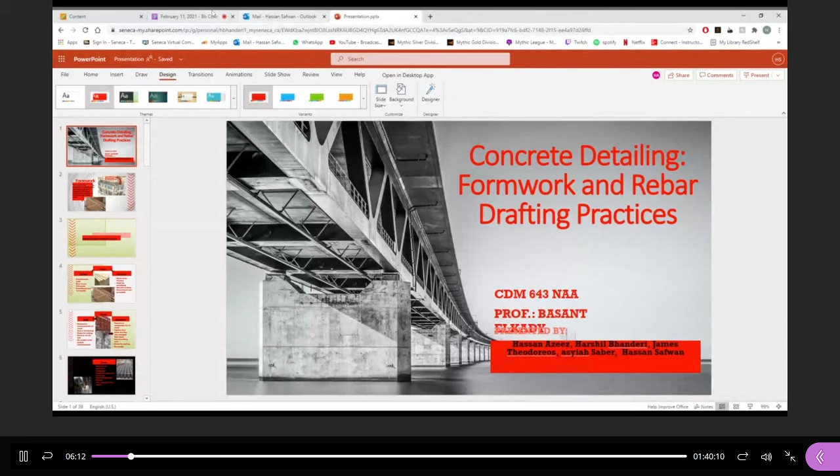Okay, so I will be the first. You'll be what? The first? I don't know if you'll be the first. I don't know. Yeah, okay. Will you be the first person to speak? I don't know. That's between you guys. Should have this all planned. Okay, I'm gonna mute myself. You guys take it over. Good luck. Okay, and you have your time here. So I'm gonna mute myself now. Okay.

Hello, everyone. Today, Group 2 will present the subject concrete detailing, formwork, and rebar drafting practices. A simple definition of concrete is a heavy, rough building material made from a mixture of cement, aggregate, natural sand, crushed stone, gravel, recycled concrete, air, and water that can be sprayed or poured into a formwork. And here, I will explain what formwork is. Next.

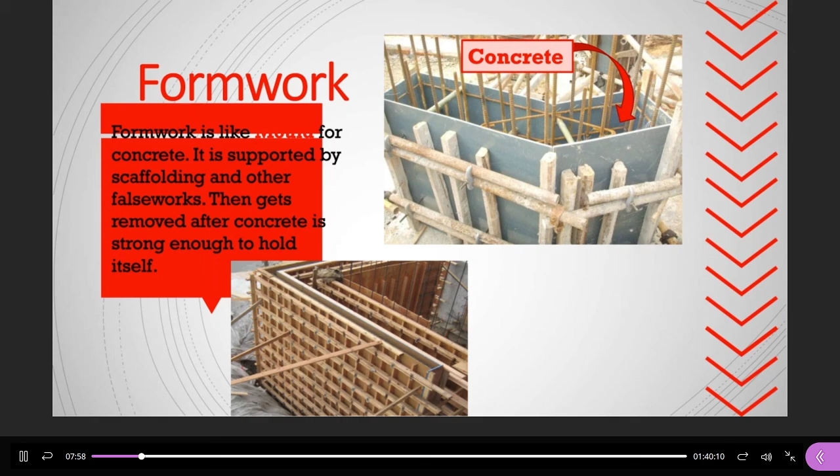Formwork is a temporary structure used as a mold in which the concrete is poured to create concrete slabs and other structures. Formwork holds freshly poured concrete until it's strong enough to hold itself. While the concrete dries in the mold, scaffolding and other falsework is used in the meantime to support the formwork. Some things need to be taken into consideration when using formwork: the sides and base should be able to resist the pressure of wet concrete. After the concrete dries and can hold itself, the formwork is removed, and sometimes the removed formwork can be reused afterwards. Next.

Material and what determines them. Next. As an ideal goal, material has two things. Materials for formwork should be easily obtainable and reusable. Second, the material should be able to withstand the weight and be resistant to distortion when exposed to the concrete and other elements. There are many kinds of material. First, timber. Traditional formwork uses timber wood as the main material, mostly used as a bracing member, and commonly available material, which has excellent strength, weight, and cost factor. Timber forms have limited usage and short lifespan.

Second, plywood is a special type of timber, manufactured wood, used especially for sheathing and the contact face, as it provides a smooth finish. It reduces the cost of building, as the smooth surface saves the cost of smoothing the concrete afterwards. Plywood gives more reuses compared to timber, but it still has a short lifespan. Next.

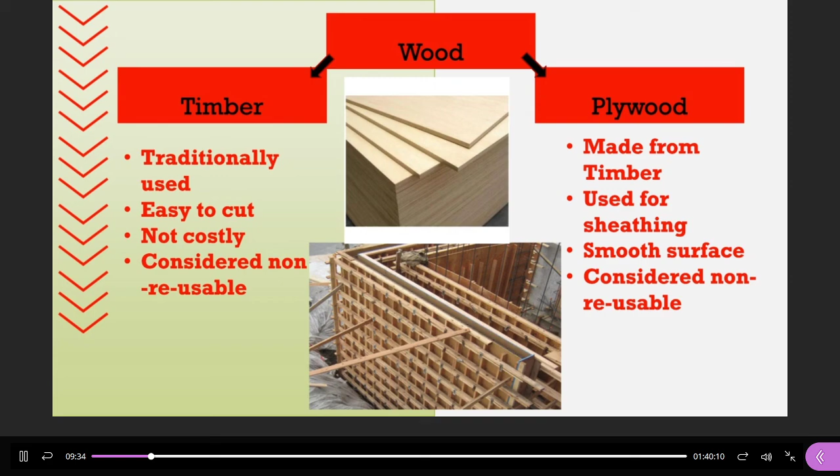Steel is very costly but has indefinite potential for reuses. It is more economical to use as it has a long lifespan. Also, they provide rigidity and strength compared to other material. It is used for heavy formwork structure like a bridge formwork.

Although there are a few problems with the steel as a steel sheet formwork, it is prone to corrosion and rusting. Also, they are harder to cut and resize since they are manufactured in a standard size, which brings difficulties for irregular dimensions. So it needs a certain level of maintenance and should be oiled after each use to avoid corrosion and rusting.

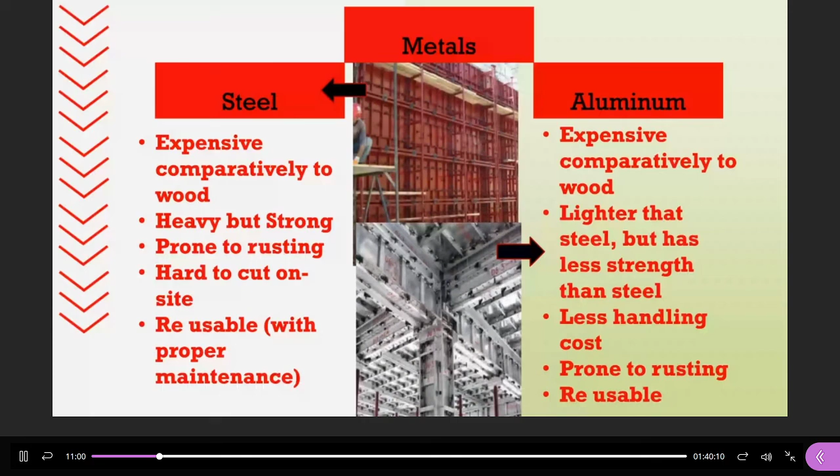Aluminium is mostly used for a prefabricated formwork, which is created on site and requires less handling. It also requires less support and ties. It reduces the handling cost since it has a lighter weight. Aluminum alloys are used for corrosion resistance and extra strength. Next.

Plastic. Plastic is best suited for low cost, repetitive structures. It is light in weight and very durable and can be reused many times. It can be reinforced with glass, but cannot take much load compared to the metal formwork. Next.

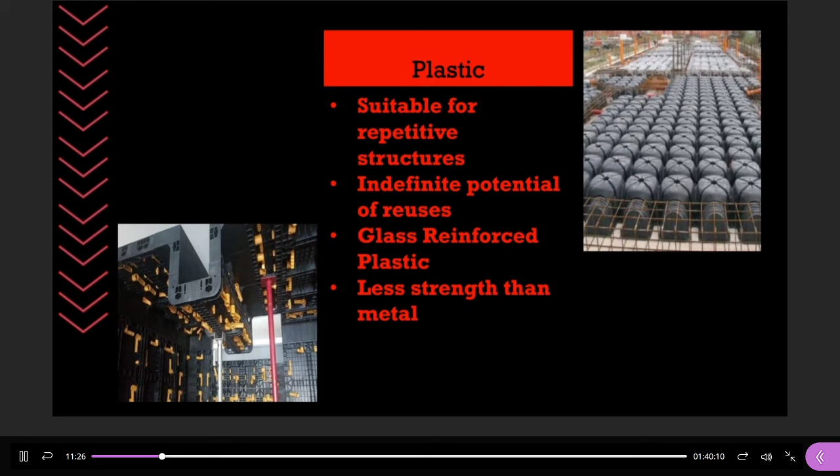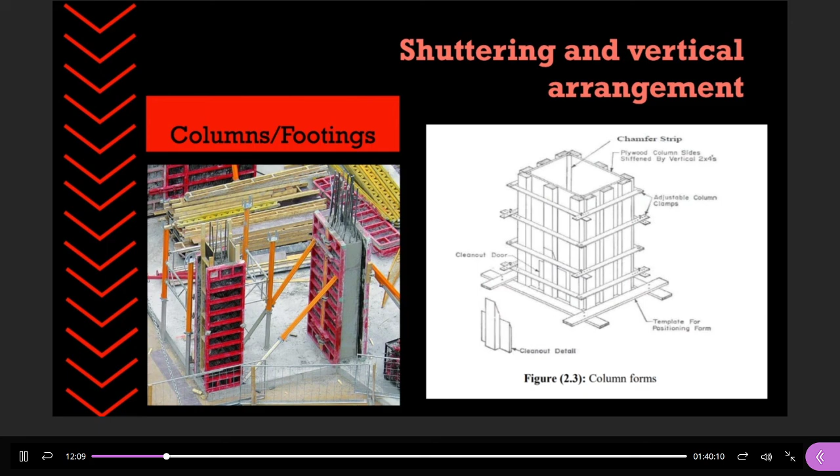Structure using formwork. Vertical arrangement. Next. For structures like column and footing and such, it consists of vertically arranged molds. Ideally, it should allow a quick assembly. Material for columns varies depending on the shape of the column. Wood and steel are often used with square and rectangular columns, but steel and fiber reinforced plastic are available for round column forms. Next.

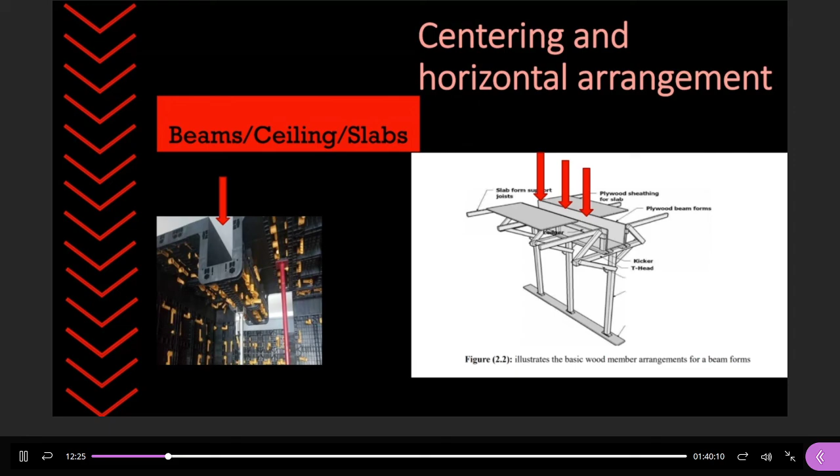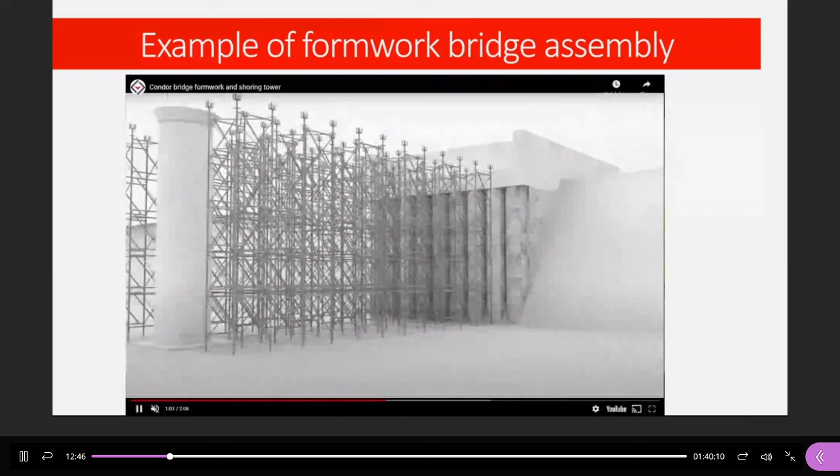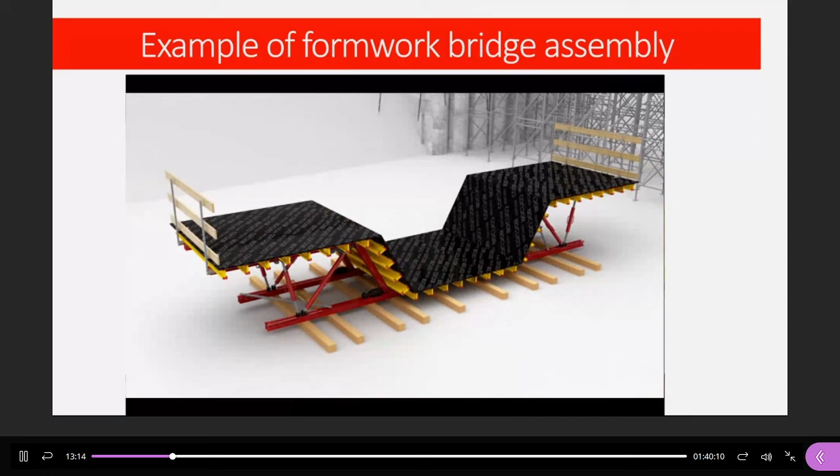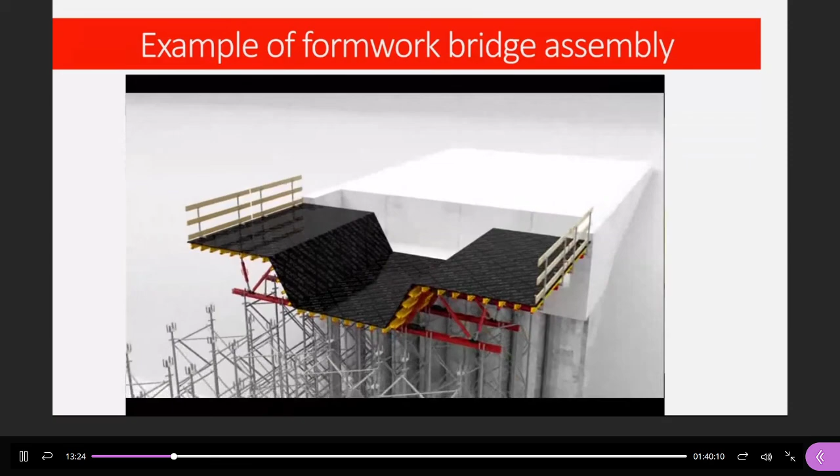This is an example of a bridge formwork, a bridge assembly. This is a very short video. This is the scaffolding. And they try to assemble the formwork. And this is the plywood, because we need a very fair face with no finishing. They put it on the scaffolding. And this way, you can put the concrete. After it is dried up, they remove the formwork.

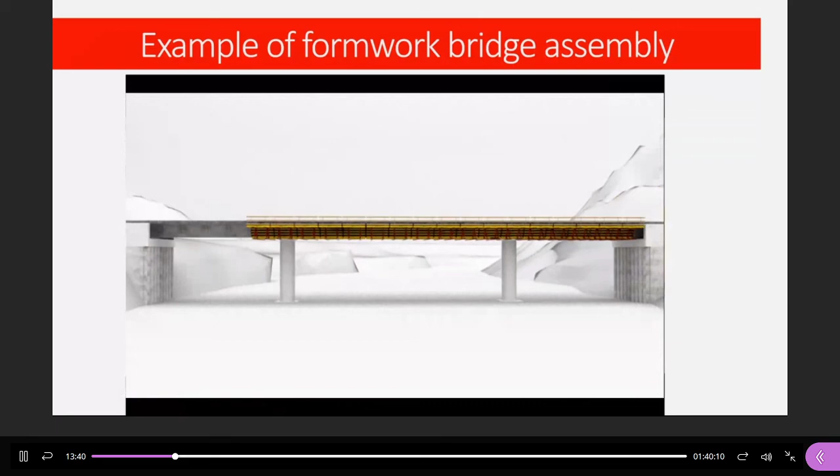Thank you very much. The second part of formwork with Harshal. Okay, go on. Yes, thank you very much, Stefan.

So formwork requirements, you could also say formwork objectives. Let's start with the economy. Economy basically means cost. For example, like Hassan said, there are different types of materials: steel, plastic, wood. So the contractor should know which material to use and which is better for them. For example, steel is very expensive to buy, but you could keep recycling it many times, more than wood. But the contractor should also consider whether they have space for storage. So all these factors need to be considered.

Next, quality. Sorry, no, just go back. Yeah, quality. So when creating a formwork, the contractor should ensure that the shape is not changed. If the shape is changed, it could reduce the strength of the column, for example, and it could lead to a structure failure.

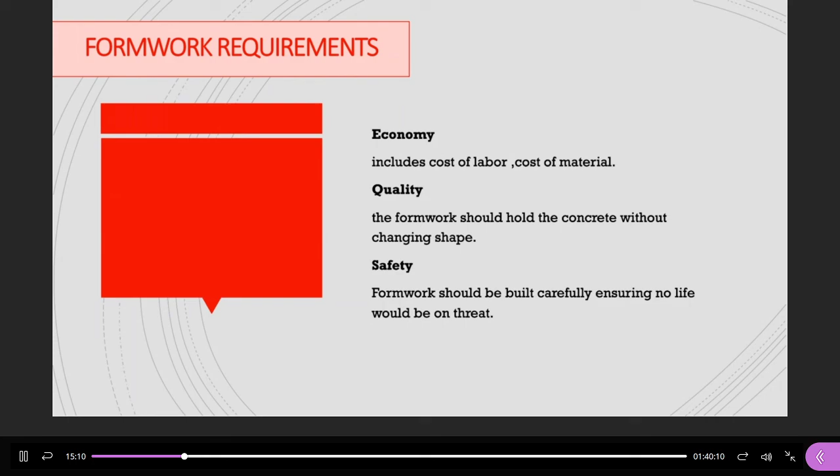Safety. Safety is very important because, for example, with a slab formwork, the workers are working on top of it, pouring concrete, and if the slab formwork fails, the workers fall down a steep hole and it could lead to death or other long-term effects. Next.

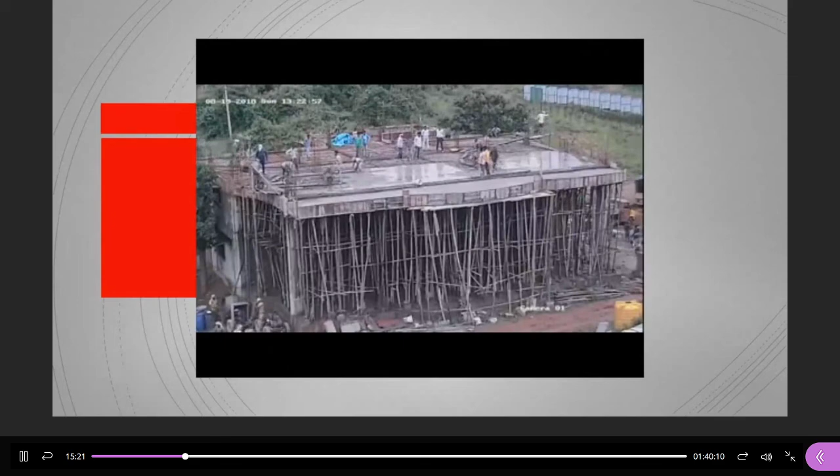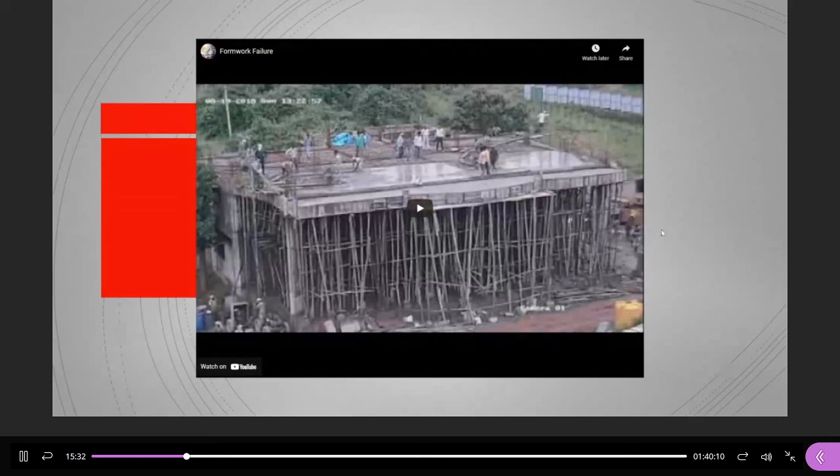Yeah, this is a short clip showing what it looks like. Yep. So this basically shows why safety is very important. Let's analyze what was the cause of formwork failure. So first one, inadequate bracing. As you could see in the picture, the load at one side is overloaded, which allows the bracing to fall, and it leads to unexpected pressure on other bracings, and it could lead to failure in the structure. Next.

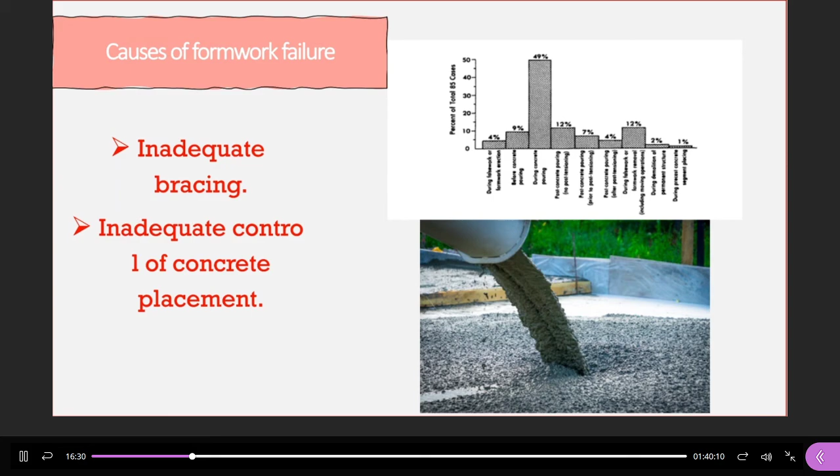Yeah, vibration and impacts. So on a construction site, there is very heavy machinery working, which could cause the bracings, for example, to shake or fall, which could lead to unexpected pressure on other bracing. And also impact: when the workers are working, they could hit a bracing and one bracing could fall over. Without them knowing, there is a weakness in the system, which also causes failure. Next.

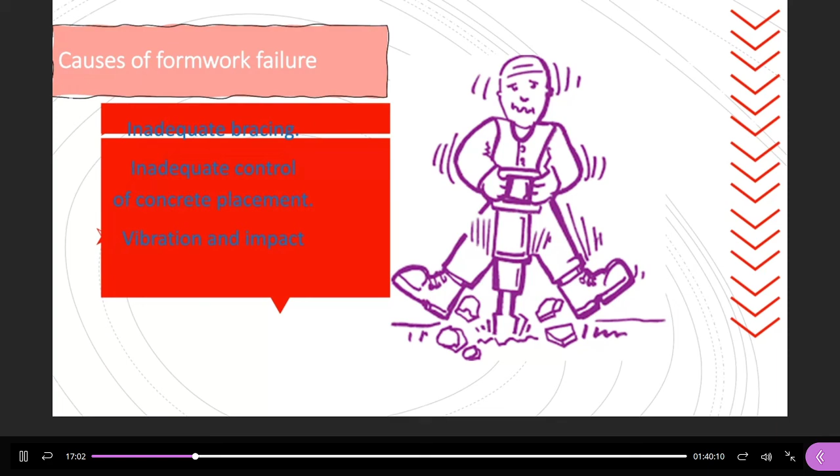Sorry about this. I think someone changed the theme. We were working online, so yeah, it's not visible, but I'll tell you.

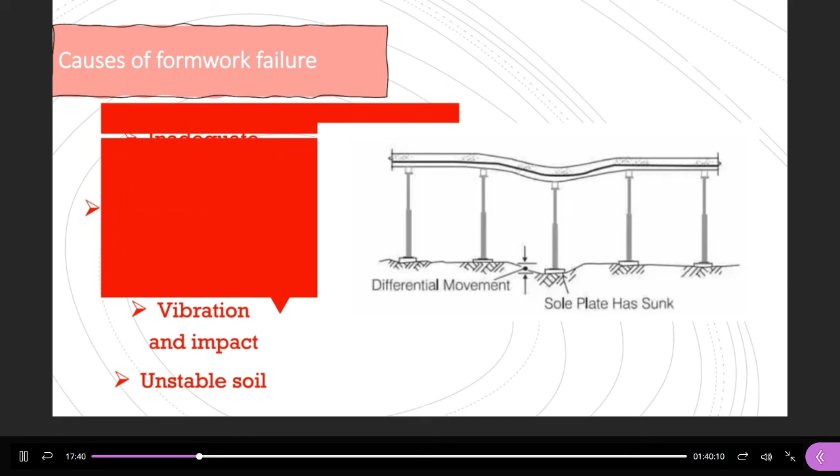Yeah, also here someone changed the theme. We are working online. Sorry about that.

So the next was lack of attention to formwork details. This is usually when the contractor is inexperienced, lacks knowledge, or just carelessness. So this is usually a small mistake like not tightening the formwork properly, or miscalculating the load of the concrete when pouring. So this is very important work. Like I said, it's safety related. So the contractor should ensure that no detail is left over and should review it again.

And the last one was improper stripping and shore removal. The contractor again should ensure that when removing the formworks and the shores, the concrete is cured properly and is not still wet or not yet strong enough to hold the structure. So it should be ensured that the concrete is cured properly, so they can remove the shores and strip safely, so that there is no deformation or sagging causing a failure in the structure. Yep, next.

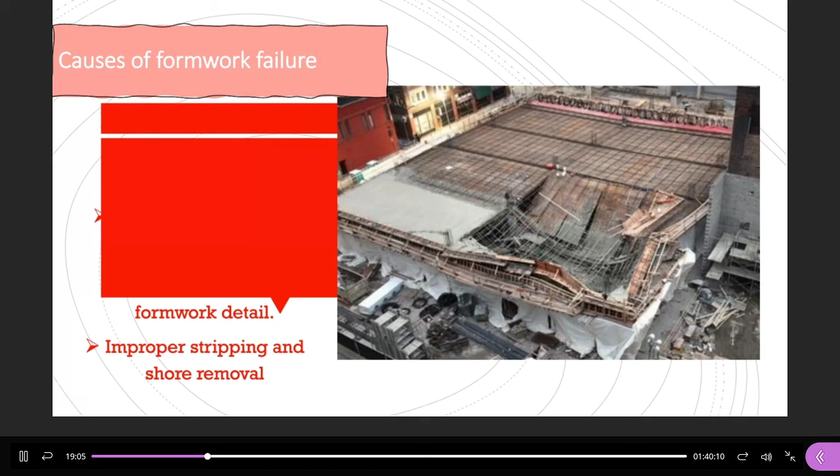I'll ask James to take over. Hello?

Okay, let's start off with the drafting practices. One of the most important parts of construction has to be the planning and drafting. Would you agree? Planning the location, the cost, and what you're building. Next slide, please. That is why we have design software to help draft up a plan and create blueprints for the rebars. And depending on the designer or the engineer, is what program they prefer.

This is a list of a bunch of programs: Bentley's own ProConcrete, RebarCAD, and the list goes on. But one of the most important ones, or one of the better ones, is Revit. Revit is a powerful tool that allows designers to create a vision in 3D. BIM Revit allows every member to be able to make easy changes in the program for the project, almost like Google PowerPoint or Excel.

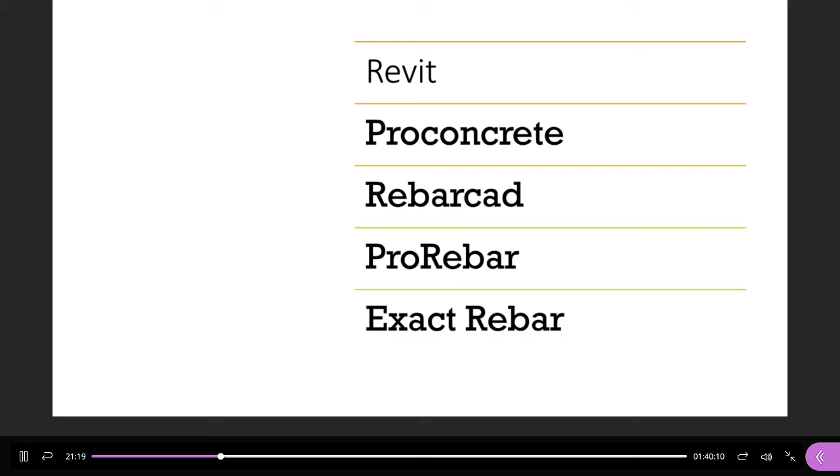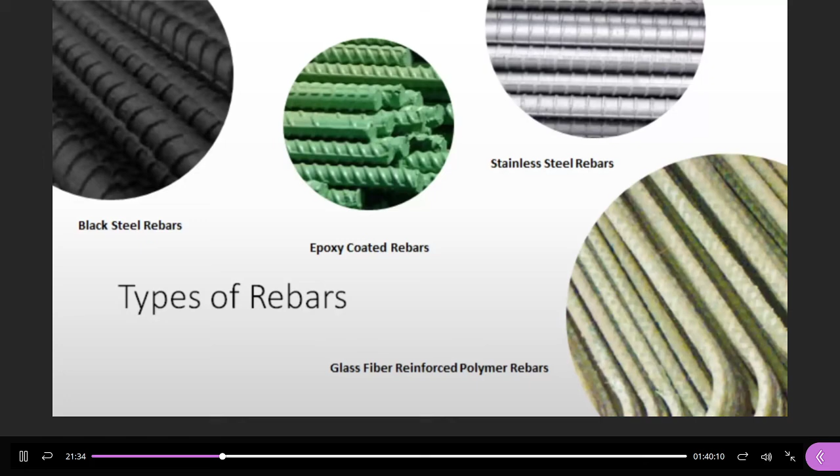So there's 4 main types of rebars. And depending on the design is what we use. There's advantages and disadvantages to all 4 of them. So what are they? Next slide. So black steel, one of the most commonly used rebars on the field. Why? Because it's cheap. They have great tensile strength. They can be welded or bent on site.

And the only disadvantage to it is that it corrodes in the concrete. This is very bad because when rebar corrodes, it can cause cracking and breaking of the concrete. So to prevent this, they usually add an anode next to the rebars to deoxidize the bars. But this is also an extra cost. Next slide.

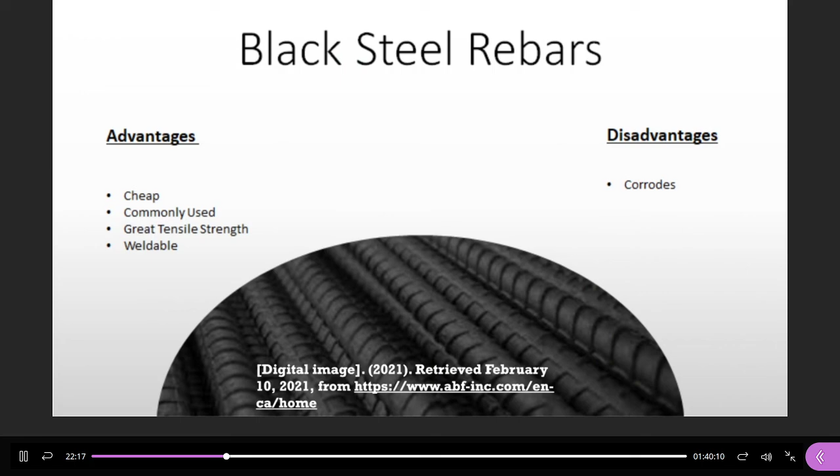So someone invented the epoxy-coated rebars. This was supposed to solve the problem of corrosion and oxidization. Well, it does, but I guess you're asking me, why do I have it as a disadvantage? Well, epoxy-coated is just black steel that is painted with epoxy. When placing and installing the bars, they can get nicked or the epoxy can chip off, which will lead to corrosion.

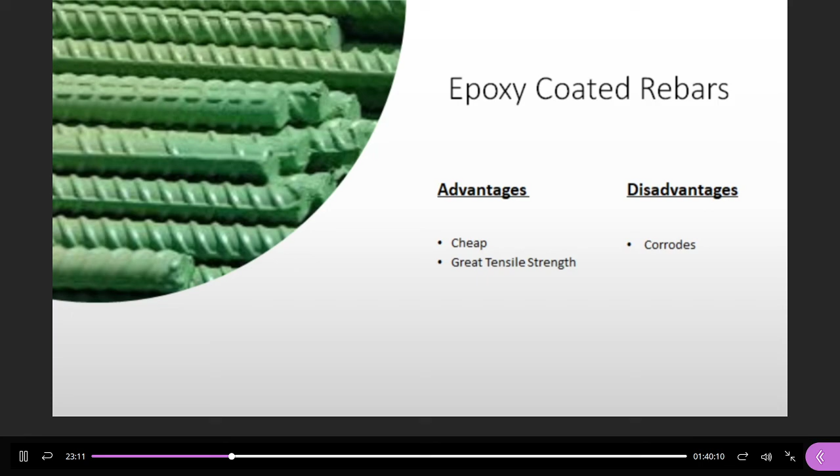Fun fact, MTO, even though they have plenty of suppliers of epoxy-coated rebars on their DSM list, they are gearing away from this type of rebar. Next slide. So here comes glass fiber reinforced polymer rebars. That's a mouthful. They don't corrode, they're light, can be cut on site easily, they're strong, they have a long lifespan. So what are the disadvantages besides a really long name?

Well, GFRP, as it's known on the field, costs a little bit more than black steel or coated steel. You cannot bend it on site, so whatever you order is what you get, and it can be brittle. So imagine pulling a rebar with tensile force. That bar, once it reaches that max force, will stretch and will continue stretching and become weak.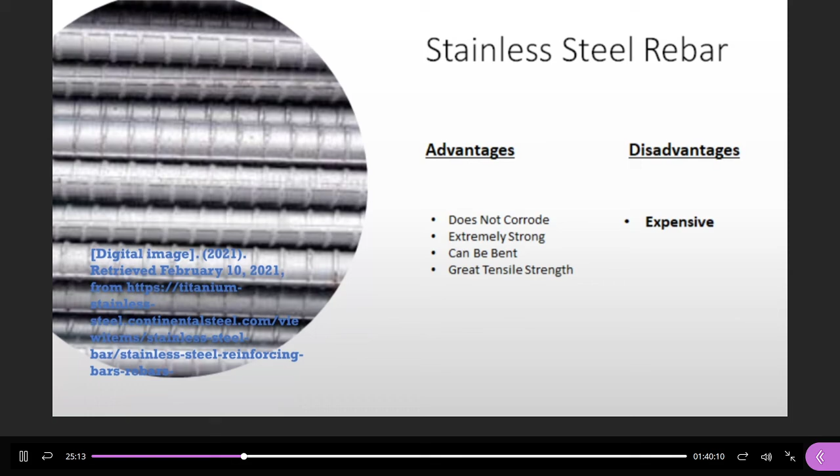So when rebars come on site, there are markings that you should know. There's the mill markings on the top, and right next to it you will see the 15M that will indicate the size. The SS indicates stainless steel.

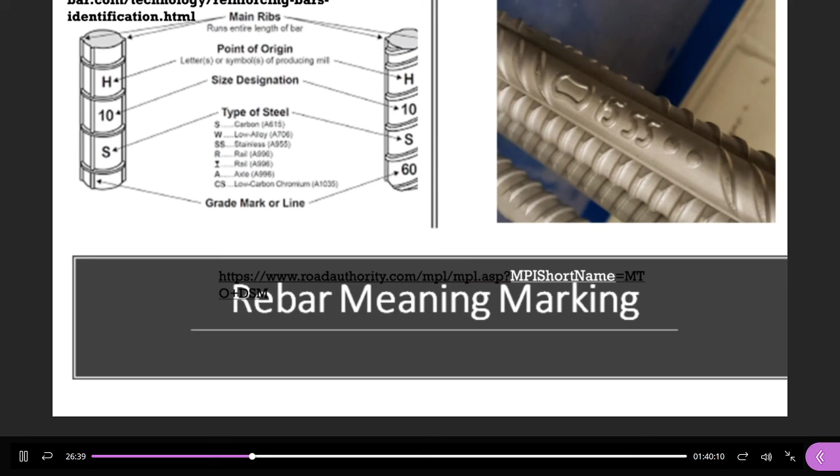Now, to figure out what kind of rebars you are looking at, there's a link provided here. That will take you to the designated sources of materials, the DSM list, that MTO allows. So the DSM list is actually a list of approved materials that MTO allows on their projects.

Enough about rebars. Let's talk about placement of rebars.

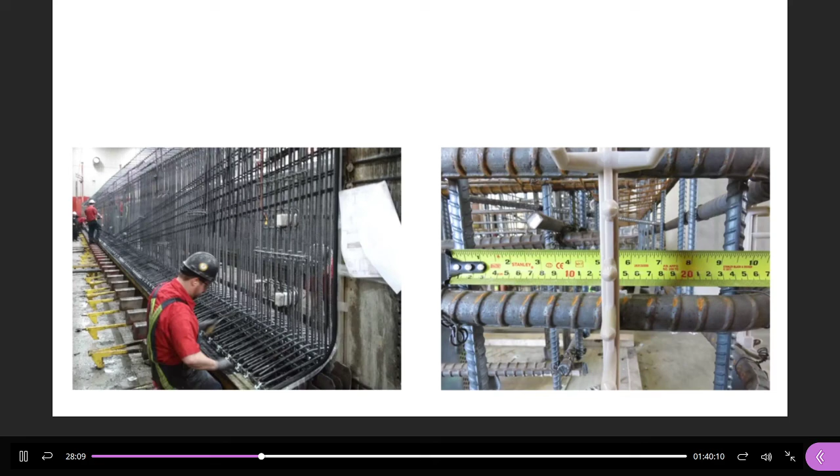This picture on the left here should look familiar. It is actually one of our exercises, exercise B, girders. You can kind of make out the shape there. So what they do is they form the rebars first, put it in a mold, and then pour the concrete after.

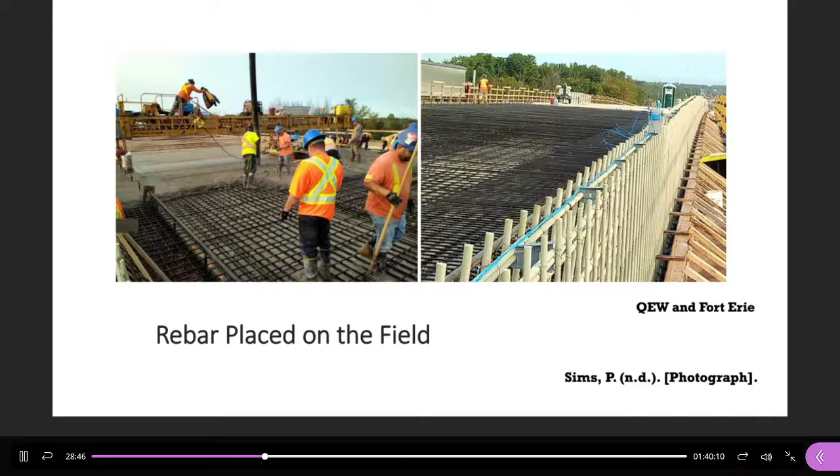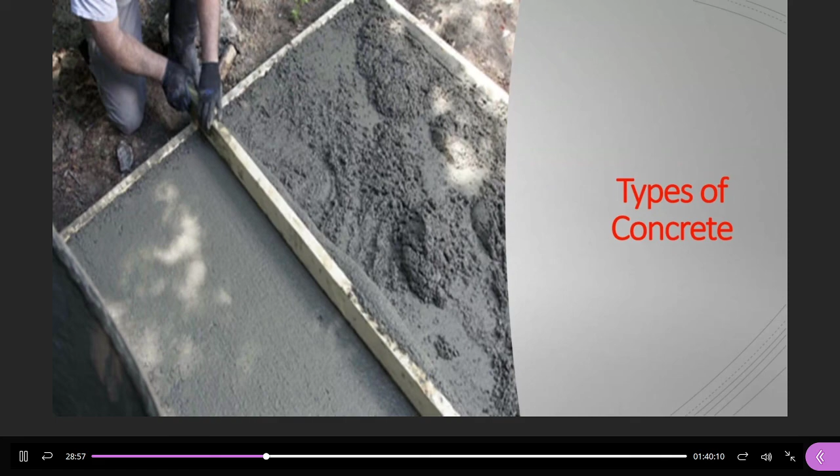Hi guys, I want to talk about types of concrete. Concrete is composed of coarse aggregates, cement, and water, and they create construction materials when mixed together. These ingredients should usually be mixed in a ratio of 1 part cement, 2 parts sand, 3 parts gravel, and half a part water.

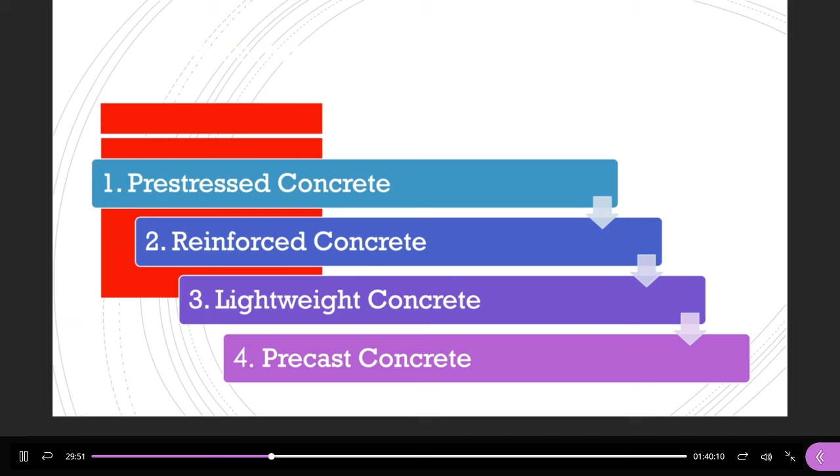There are many different types of concrete that can be used for bridges: pre-stressed concrete, reinforced concrete, lightweight concrete, and precast concrete.

Prestressed concrete is created using a special technique, like reinforced concrete. It includes bars, and when the concrete is mixed and placed, these bars are placed at each end of the structural unit where they are used. Prestressed concrete is used to build bridges, heavy loaded structures, or roofs that have long spans.

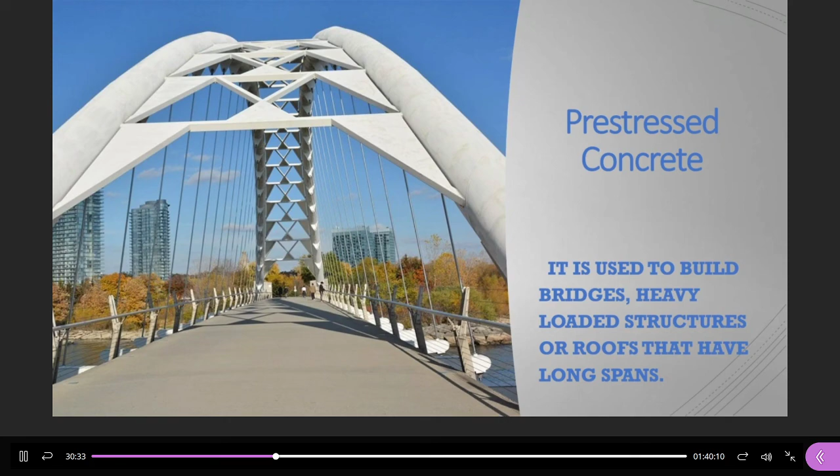Reinforced concrete is widely used in industry and modern construction. The strength of reinforced concrete is aided by placing wires, steel rods, or cables in the concrete before it sets. Buildings, bridges, and roadways rely on reinforced concrete. Here's an example of a reinforced concrete design lab test. You can see, okay, please play it.

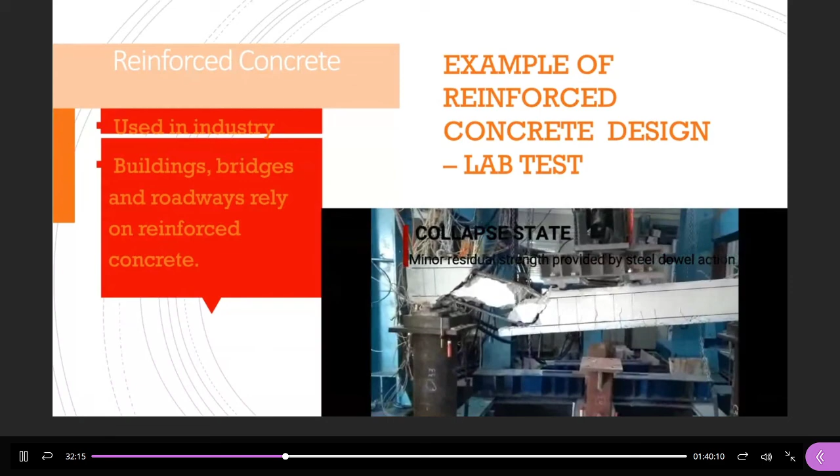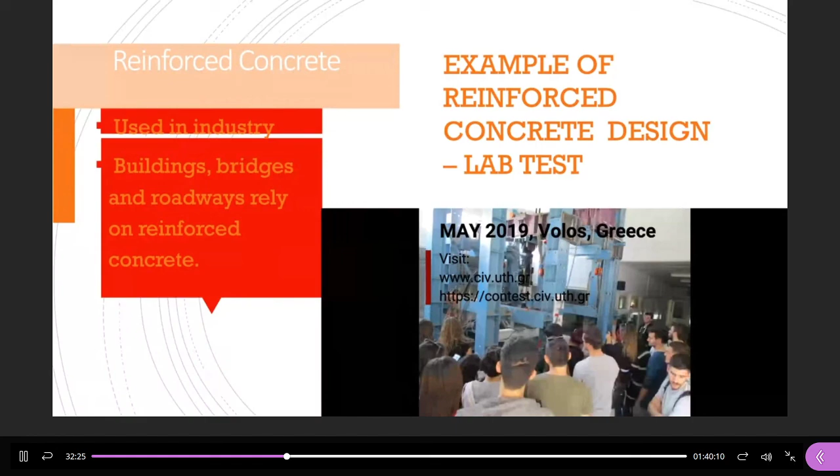Lightweight concrete is a kind of concrete that has a density of less than 1,920 kilogram per meter cube. Lightweight concrete is created by using lightweight aggregates, which are ingredients that reduce the density of the concrete. These lightweight aggregates include natural materials like scoria or pumice, and artificial materials like clay and expanded shales.

Common uses for lightweight concrete include creating long spanning bridge decks and building blocks, and it can also be used to protect steel structures.

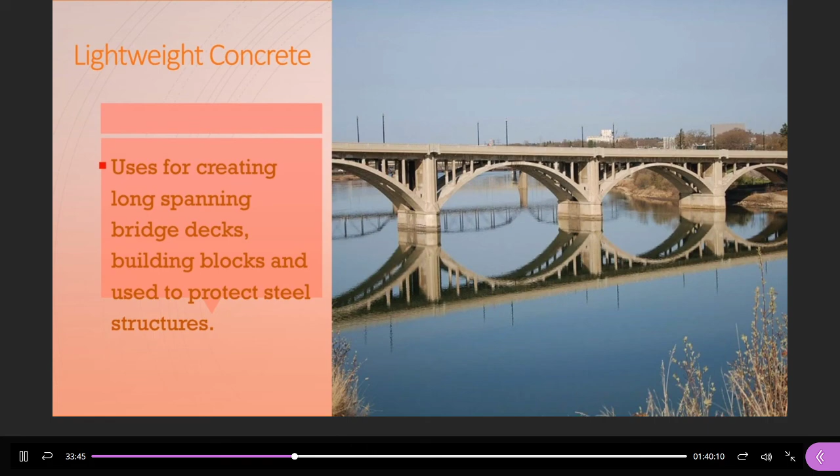Precast concrete is created and cast in a factory according to exact specifications. Precast concrete units are then transported to the site and assembled. It is used for bridges, concrete blocks, precast walls, staircase units, and poles.

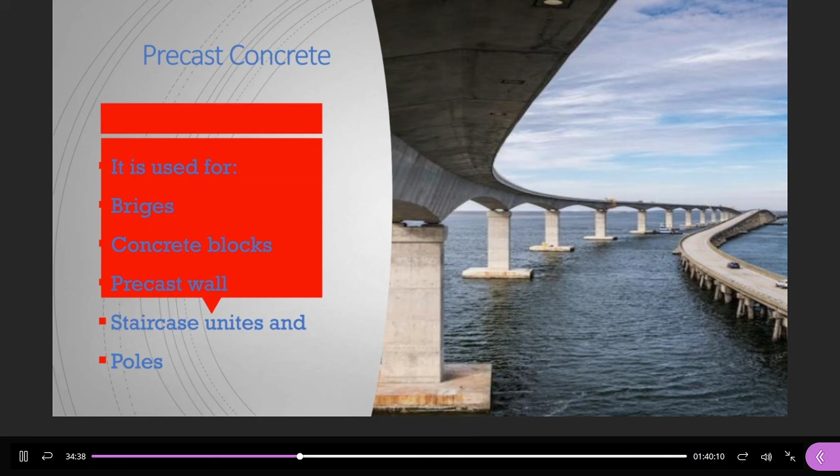The advantages of using precast concrete are its speedy assembly, since the units are manufactured in a factory, and they are of very high quality.

So I'm going to be talking about precast versus cast in situ. Precast is usually built in a factory, in temperature-controlled environments where temperature is adjusted for optimal strength. In factories, concrete tends to be stronger because you eliminate worksite complications.

For example, at a worksite you would have fluctuating temperatures, changing humidity, sun exposure, or no sun exposure. All these affect the quality of concrete. In a factory, they have special tools to create better end results.

One common tool used is a shaker. I don't know if that's the actual terminology, but what it does is vibrate the concrete to cause air bubbles to escape easier, ultimately making it more dense and stronger.

The drawbacks of precast are that the materials need to be transported and carried onto a site, usually with a crane, which adds some complexity to projects. Here I can show you a picture of them arranging a bridge.

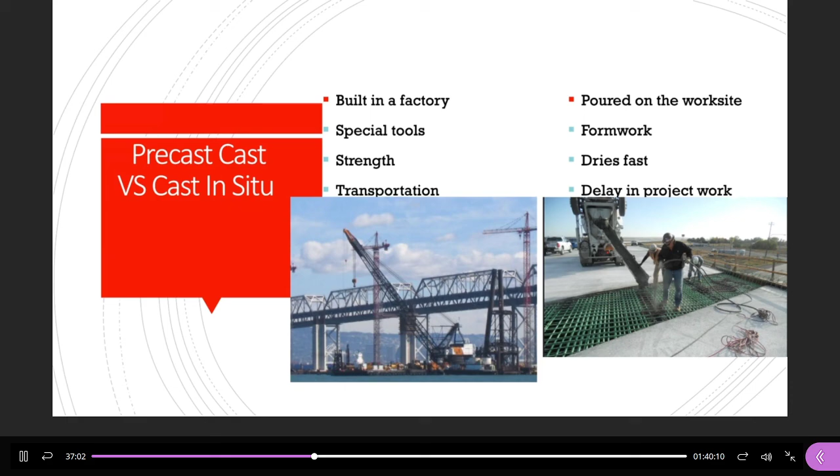Admixtures are exactly as you hear it, you add to the mixture. When mixing concrete, these admixtures are added to alter the properties and functions of concrete. There are 5 common admixtures used in concrete.

The first one is super plasticizers. These increase the strength of concrete and increase the workability, so as you pour it, it's easier to work with.

The second one is water reducing admixtures. This is used specifically to reduce the water needed for concrete. This causes the concrete to have a low slump, resulting in improved concrete properties.

The third one is accelerating concrete admixture, used to speed up the curing process of concrete. For example, if concrete gets to 50% of its strength in 14 days, adding this can get 50% in 7 days—this is just a theoretical example. This type of admixture is used in colder climates, such as, I guess, Ontario.

The fourth one is air entraining admixture. This plays a complex role, especially in colder climates such as our own. Its intended purpose is to create gaps within the concrete to avoid cracking due to freezing and thawing. The problem with these gaps is the concrete becomes very porous, which ultimately causes reduced strength.

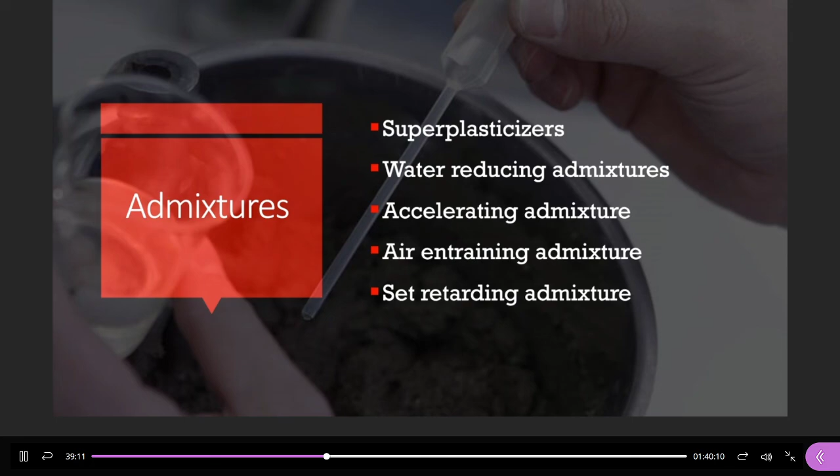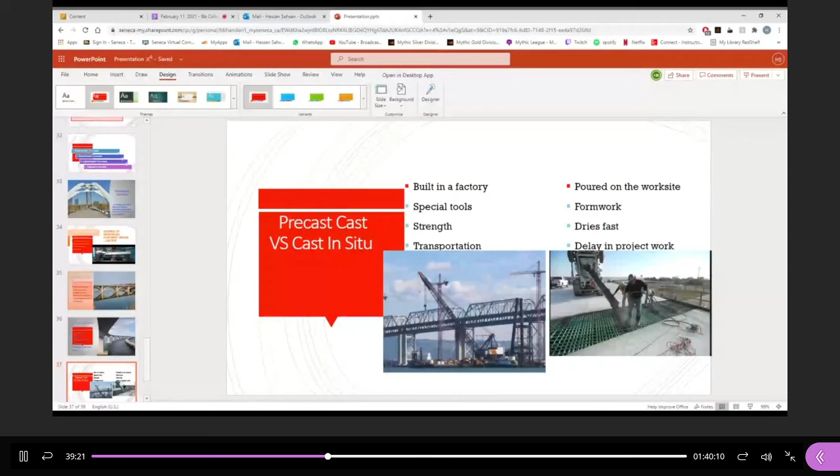Thank you. Does anybody have any questions? Here we go, we got some questions for you guys. Okay, so Trong has a question, Michael has a question, there's a whole bunch of them, so I'll leave them for you guys to respond. But thank you very much for this presentation, and then we'll get started. So whoever wants to take it away from your group.

So the first question is: do wall and column formwork get erected at the same time?

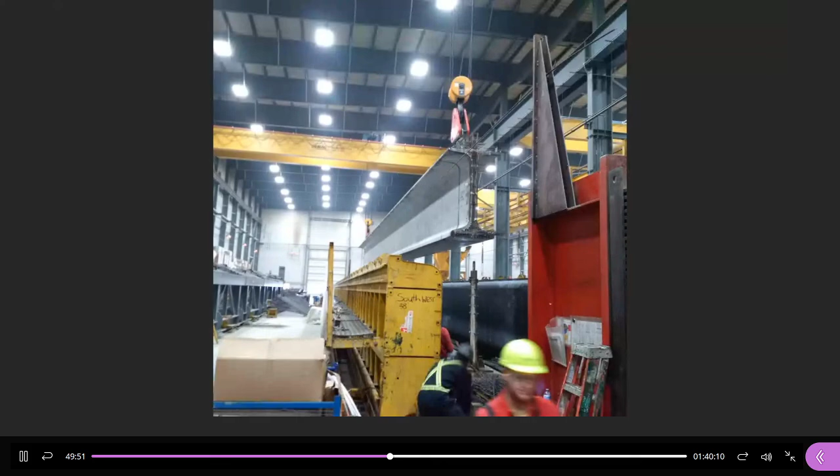Sorry, I have one picture, if you want. Oh, James, go ahead. It's not on a truck, but let me see if I can share it. It's just how they're lifting it up. This is in the plant, and they're going to put it into their open-air space area, right? Exactly. Well, this might actually go into their curing room first, and from there it will go to an open space. Okay. So here it is, guys. That's precast. Thank you very much, James. No problem.

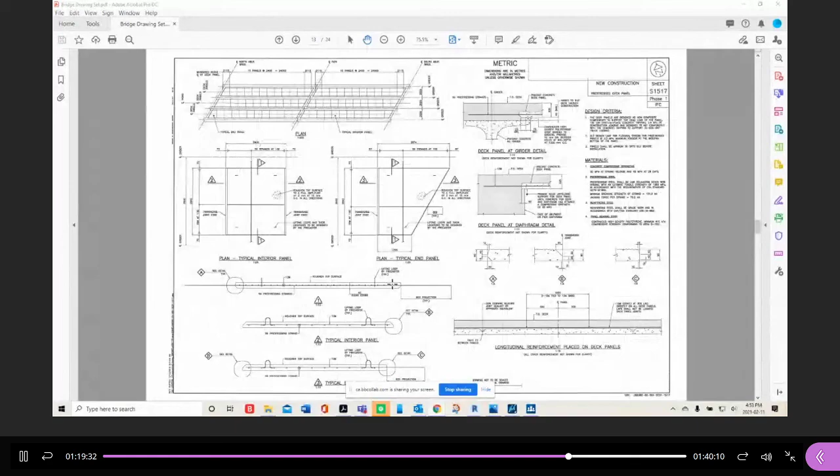Okay, guys, I just want to discuss rebar placement because I've had a few questions about rebar placements over the last few times. So I'm going to share my screen here. So when we're placing rebar on a drawing, you don't always, this is an older drawing, so it has a lot of the rebars that you're seeing, but usually you do not. I want to see the one that we have.

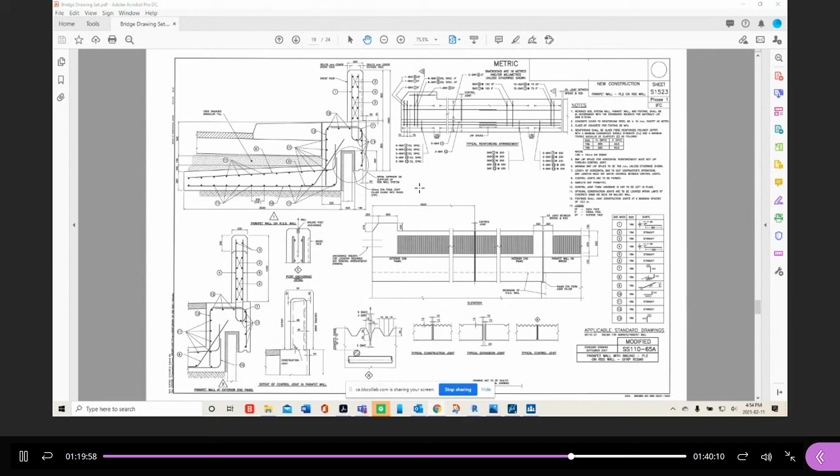Usually you do not see all the rebars. You just see one, and it would tell you that the spacing is this much with the type of rebar. That's how you would see the rebar on site, on a drawing plan. So I'm just going to show one of the examples that I wanted to show here.

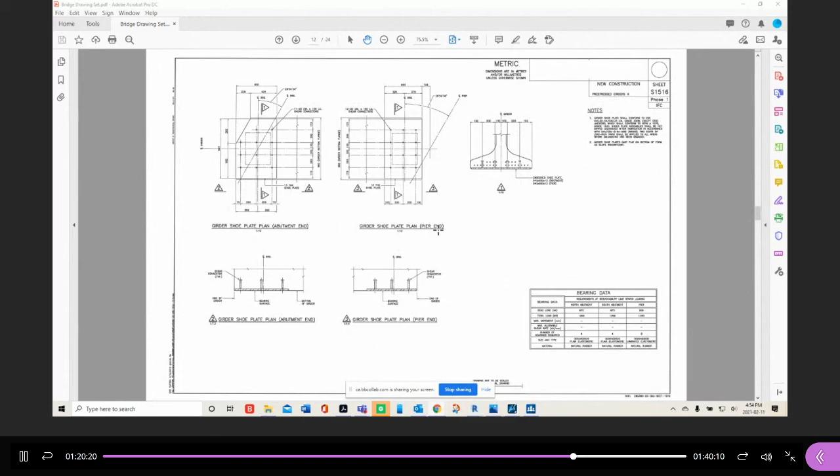Okay, so here. Okay, so here it says, oh no, this one's not it. Okay, so here you're going to look at this one, and you're going to see where it says here 15 to 20M's at 200 top, lower.

Okay, so when we're only showing one, we don't need to show them all. So what it says is that from here to here, there is this type of rebar, which is either 15 or 20. At the top, you're going to have them placed at 200 millimeters apart. So you just show one. You're just showing one example, and then they place them on site. Okay, that is why you are only going to show me one on your project, part D. Okay, I hope that clarifies that.

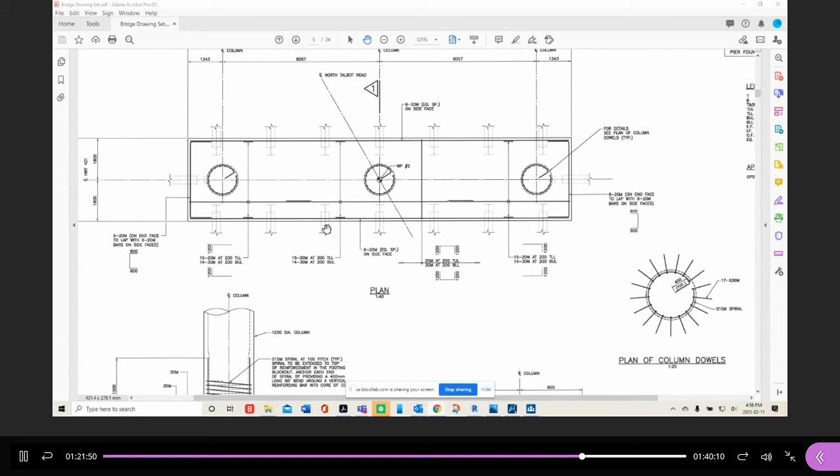But in reality, when you're even at work, you wouldn't even need to place all these dot rebars here too. You would just show a few on one side, and you say typical, however many 6-20M bars or 10-20M, whatever it is, right? And just show a few of them and just say typical, right?

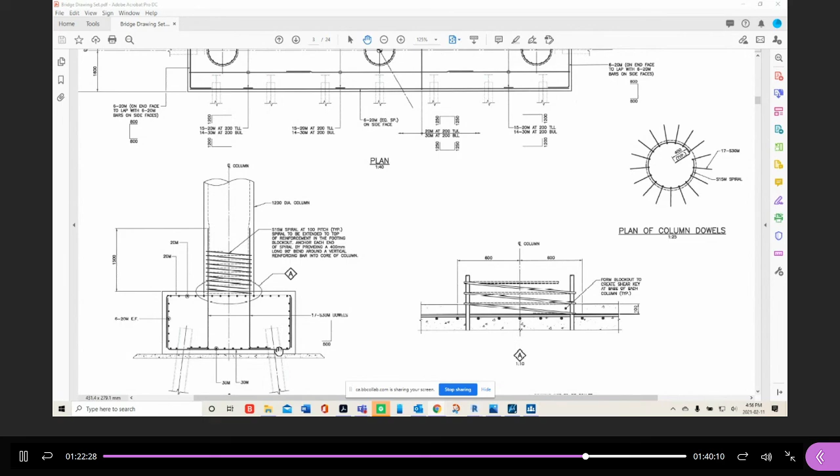Typical on both sides. You might show just a couple here, and then that's it. At the top, you would show the same, a few here, maybe a few here, same thing at the bottom, and then that's it. That's how you show rebars. You don't always show every single one. It would overtake the drawing. I hope that clarifies that. Trong, I know you were asking here.

So when I say placed at 200, yes, that's 200, 400, 600. So it's just 200 apart. So from here it's 200. Let's say from that one it's another 200. From that one it's just 200 space. The spacing between them is 200 millimeters. Okay.

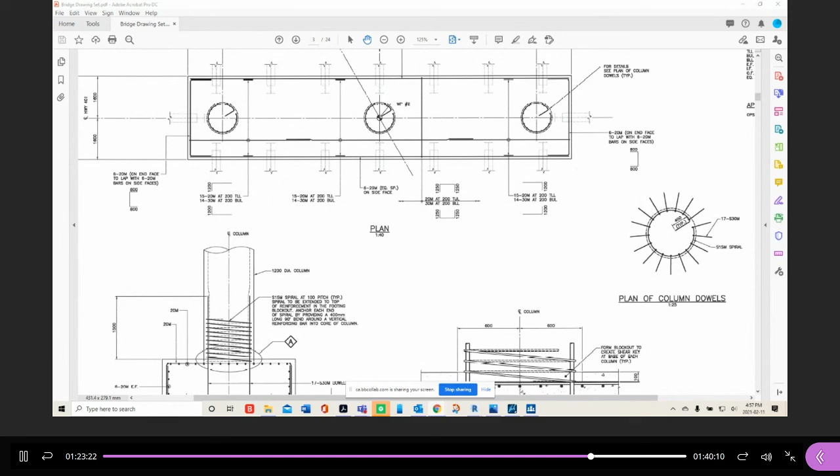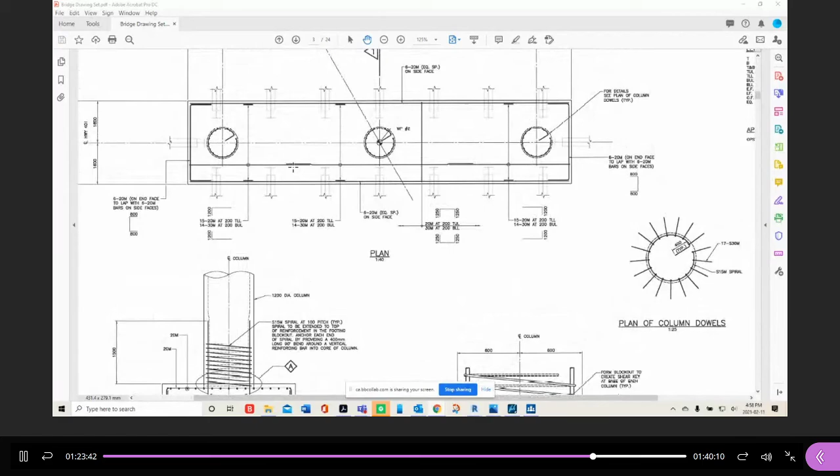On the plan, there is one. Sorry, Hassan, what are you asking me? Yes, sorry, Prof. On the side, there is a piece of rebar. What is that? Is this rebar? Where? This exactly? No, on the plan. On the plan view here? Yes, on the side. Yeah, this part.

No, it's just showing that, okay, this is the main rebar. This is the bottom rebar, right, or the one side rebar, and then these rebars start after, so it's showing that it starts from here. So usually there's like 50 millimeters apart. There's 50 millimeter spacing, and then the rebar.

Sorry, Prof. Your sound is echoing. I can't hear anything. Can you hear me now? Yes, it's better. Okay.

So what I'm saying is usually there's this main bar. And then after that, you're going to have these rebars going from after this main one, going at 200 millimeters apart, but they usually start about 50, anywhere between 50 and 75. It depends on how close they want them. And then they place them 200 millimeters apart after that. What it's showing with these little two lines is the end of these types of rebars. Okay. Do you understand what I mean?

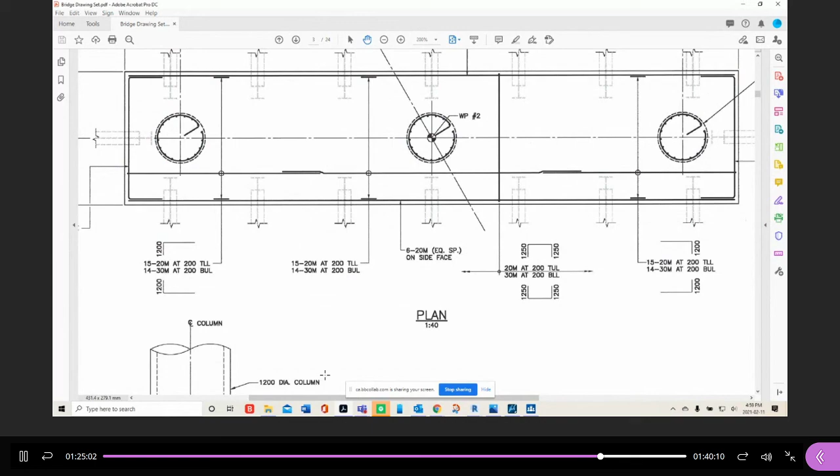Because if they didn't have that, it means that you're going to say, I want this type of rebar, this main one, 200 millimeters apart, because they wouldn't understand. It would not be specific.

Okay. Is it important to draw it as we show it, or can we ignore this part? This little line? Yes. So you're drawing it based on exactly how I asked you to draw, how you see that layout image. So you don't even need to do all the text for it, the annotation.

Okay. Thank you very much. You're welcome. You're very welcome. No problem. Okay. So that's it for rebar. Go back to work.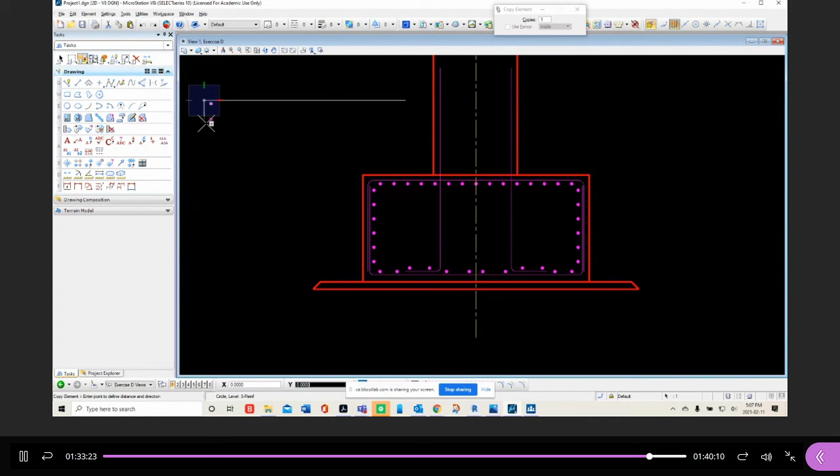Okay, guys, I'm going to go ahead and show everybody arraying. The reason for that is because we have the number of rebars. So if I want to place rebars and not have to draw them out or measure out the distance, right? I'm going to just copy one of these. And I want to array them.

So what I'm going to do is go into my array feature, or my array button. It's under where you do all your editing. So it's array number 6. And here it gives you options where you can array rectangular, polar, or along a path. So you can do rectangular and then just say how many you want per row or per column. So I just want 1, for example.

Right? And then for the columns, I want 14. This is the top one. Or sorry, 15. See, I messed up again. And then the spacing, we want to have 200 millimeters. I think it was this one that I had to change. Okay. And then it's going to ask you here to identify the element. So I pick the element.

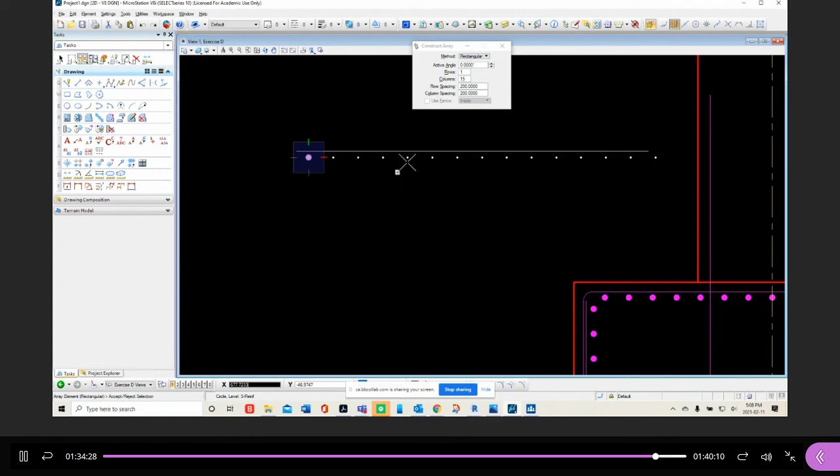And then it automatically shows you little dots to show you how they would look. And if you go away from it and just click on your mouse, it would automatically array the number that you wanted with the space that you wanted. Okay. Now you can also do it along a path. Arraying is really simple because you can put information right in here as well. You can do it on an angle if you wanted. The path one gets a little bit tricky sometimes.

And so if I want to array along a path, you can either say number or distance or both. So you can say how many you want with a distance, or you can say you don't care about how many you want, but you want a specific distance. So you want to say here 200. And then it's going to ask for your reference points.

This is where it gets, I want to array, path, I'm going to identify the element. And when I do that, it automatically places whatever amount of numbers, as long as it has the distance that I set for 200.

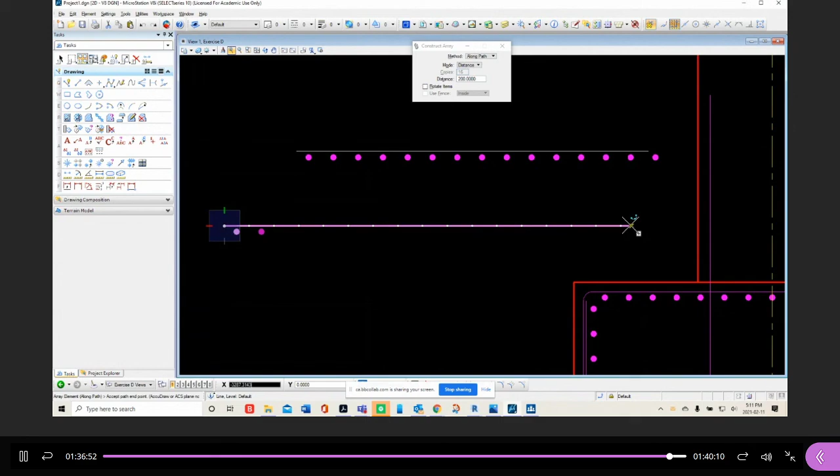Now, once you've done that, you might have ones that are off. At that point, you can just erase the ones you don't need. So you can get rid of this one, for example. Okay. Any questions about arraying? It's pretty simple, but I thought I had shown it for this class. I guess I hadn't, so I apologize. So again, any questions? If no questions, we'll just keep going.